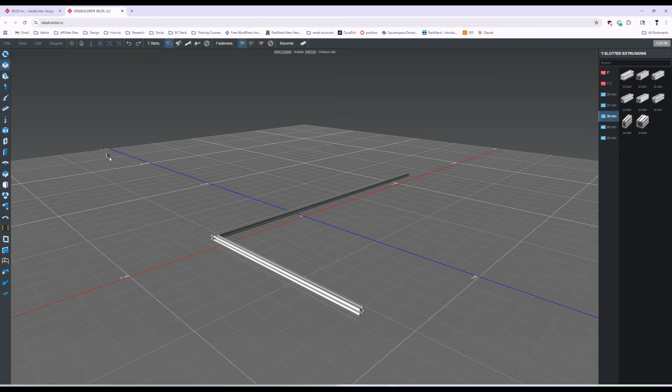So my very first drawing, I took all the measurements off of the old sofa and the bed—what those cushions were—to use as a template for how I was going to build this thing. Here's a copy of that drawing. You can see how wide the cushions were, the space I had between the sofa and the cushions where the fuses were and where the water lines ran.

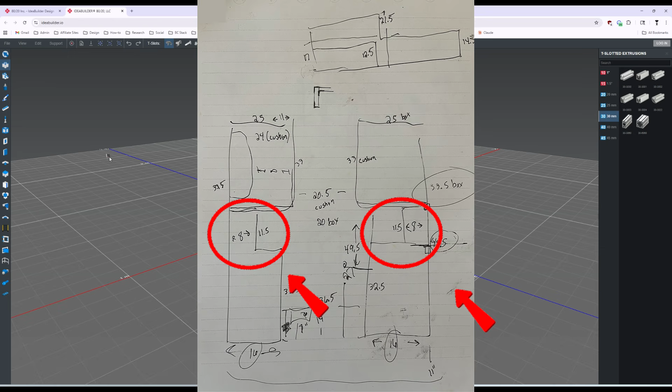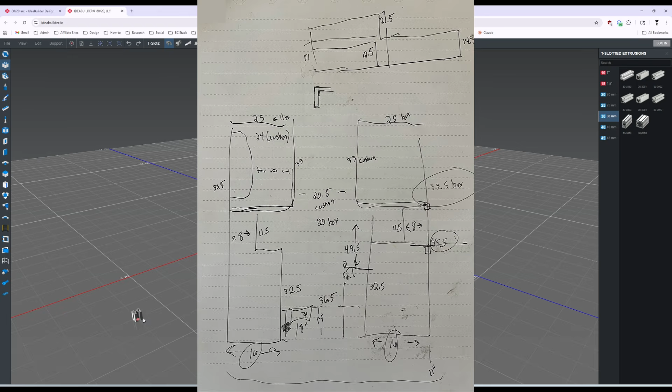And then the areas that covered the water heater and the inverter on the other side—so you see the whole dimensions. The cushions were pretty much 25 inches wide on that box, and what covered the other two components was 16 inches wide. This also shows how high in elevation everything was. So that started as my basic design. From there I drew, and I've saved copies of these along the way.

So here we go. You can see the very first bed drawing that I did came out something like that.

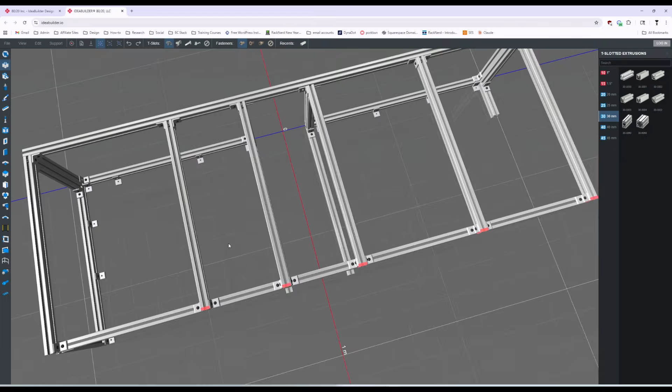Along with this T-slotted profile that you're going to use here, you'll also use this pan button, which is what gets you moving around. You'll use orbit to rotate things, so you can see the 3D design there. Then you use zoom to zoom in and out, either by scrolling with your mouse button or dragging on the screen.

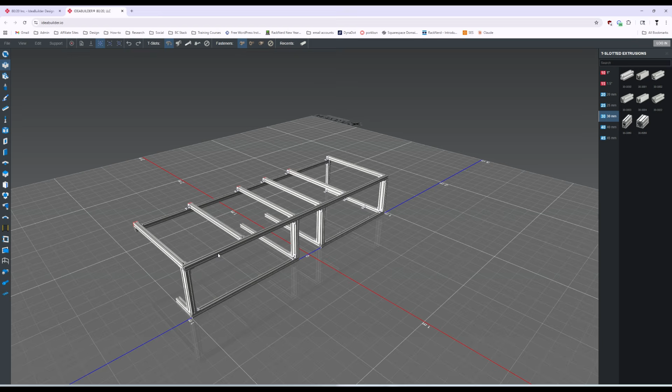This was the very first, very basic design for what I started doing. When you click on these pieces, I have to go back to select, click on a piece, and you can see what that is. That is a 1955.8 millimeter piece, which is about 77 inches.

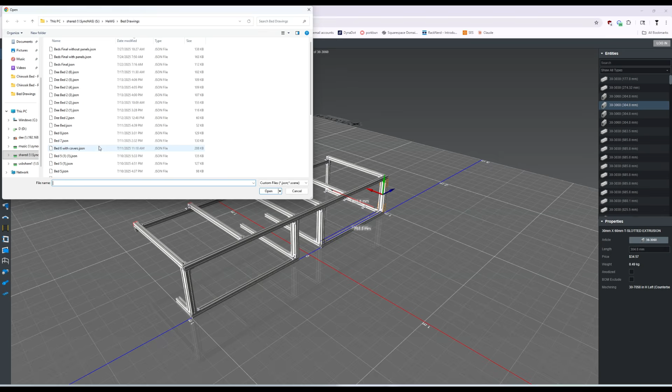So the drawings progressed. I'll just grab one of these, come midway through, and do one of my beds. This is one of the designs I did with the crossbars coming across this way for support. Since this is my bed, let me rotate this. This would be the space where the water heater is, and this, of course, is where a wheel is over here.

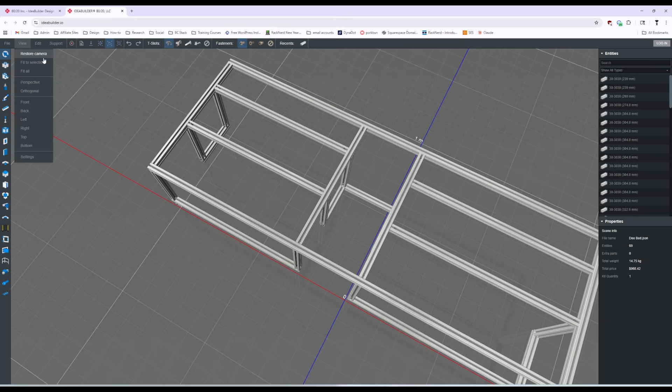So I played around with the drawings, trying to figure out the spacing for the support beams going through, and moved up to one of the last beds. Getting towards the end here, you can drag to rotate.

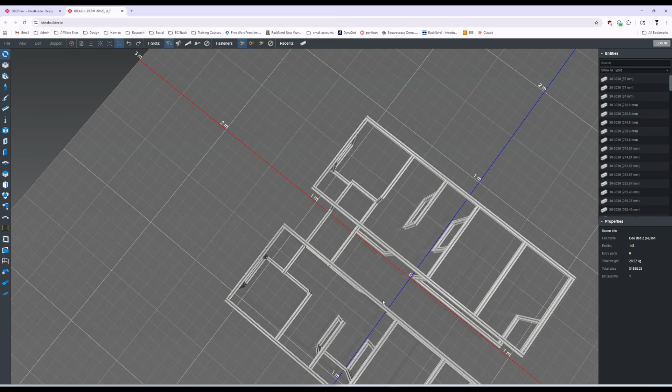Now we'll just zoom out a little bit so you can see where we're going. This is where I had a bit more of the layout done. We're not quite there yet, so I'm going to drag this over and pull this up.

So when you have the drawings here, you can do a file save as, and it will save it wherever you want, so you can have as many copies as you want. Absolutely amazing for what is essentially a free program.

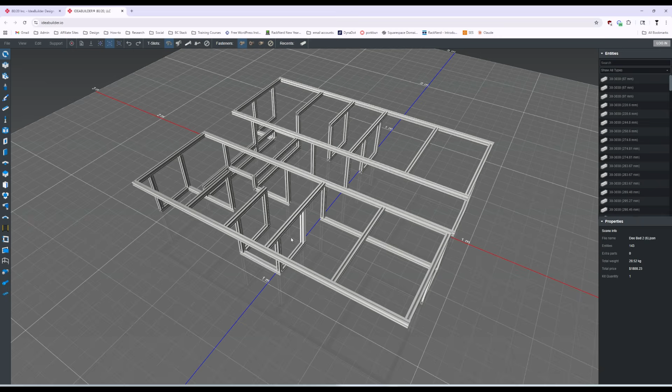We're going to open the last one, which is the bed final without panels. It's got a few panels in it, so you can kind of see where I was going with the drawings.

This ended up being the box that I had to cover the diesel heater with. This is where the inverter goes. This is where the water heater is. This panel has fuses, this panel has none, but the water lines are back here to go to the water heater.

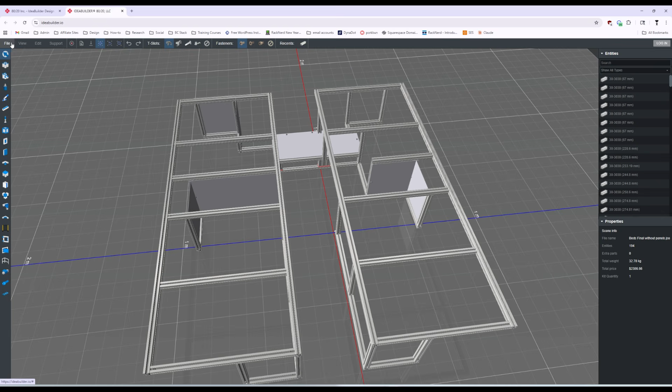So we will drop into the final with panels so you can see what we got, and I'll just rotate this around a bit. So that is where I ended up with the drawings.

This is how the bed is laid out with the extruded aluminum. If you look over on the side here, you can see all the different pieces that I'm using and all the panels associated with it.

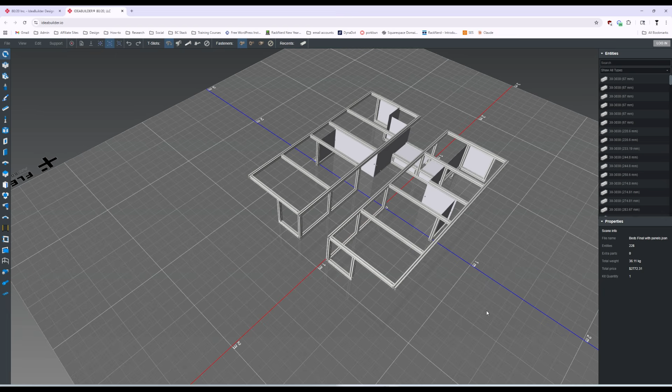So you know every cut piece you have here and its length, and you can give it a good spin and see where that is. So I ended up with the fuse box right here. There's an outlet here, of course, that faces the other way, and a USB plug here and here.

So that is basically the design. From this, I knew how many cuts I had to make.

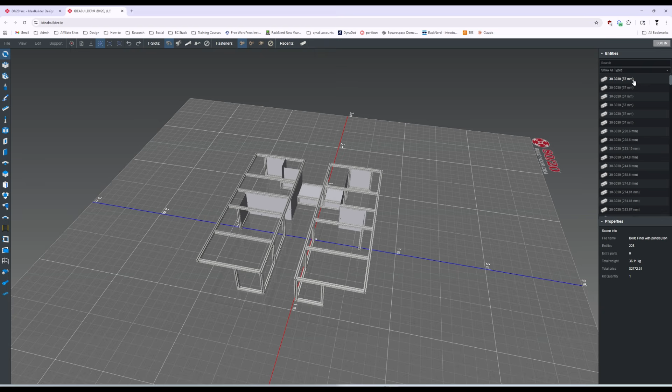I asked ChatGPT, and I'll give an example of this: I have this many pieces of this length of extruded aluminum, and I need them cut to this size. All right, let's go show you how I actually put all of this together.

The caveat for doing the design was everything in my van, all my measurements, all my thinking, is imperial, inches and feet. But the extruded aluminum I bought is in metric. Oh. So 30 millimeter was the size I went with.

So I had a spreadsheet and long talks with ChatGPT for how to convert that from inches to metric. It worked out really, really well. That's awesome. So once I had all the aluminum ordered and the design nailed down fairly well, I once again went back to an AI to tell me how to cut it.

This was the part I really was impressed with. I think I used Copilot for this, but ChatGPT gave me the same answers. You can say, I have this much extruded aluminum, I have this many 5-foot pieces, I have this many 3-foot pieces, and I need to make these cuts. How can I make them so that I have the least amount of wasted aluminum?

I haven't been able to find that chat yet, but I'll start it again if needed, just to show what I was looking at. I just want to show an example of using AI to help you make these cuts. These aren't the measurements or pieces I actually had, just an example to show you.

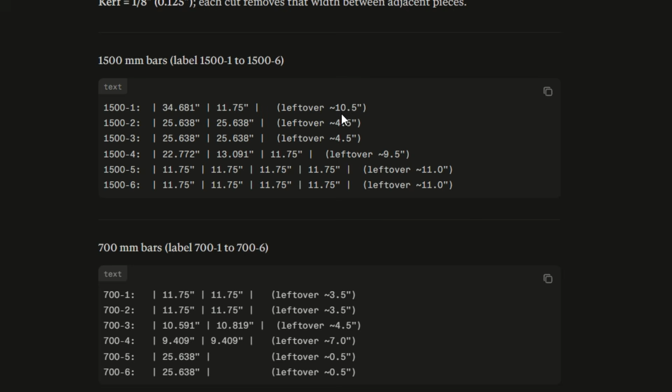So there are the cuts you should do with each bar. It will tell you on the 1500, make this cut, make this cut, here's the leftover you'll have. And then it was just a simple matter of building it.

A simple matter? Simple matter of building it. I thought it was pretty simple. Hey, Greta.

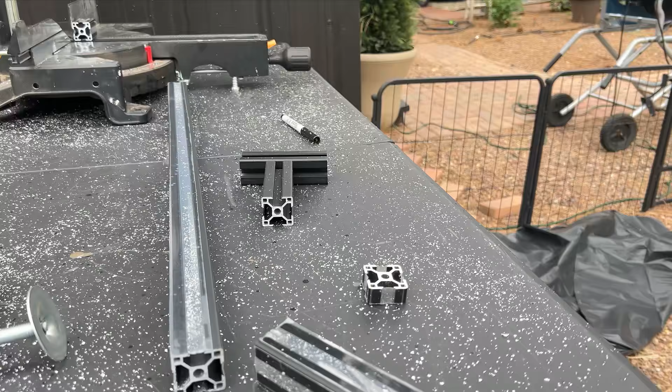Now, the work table in the backyard that has the saw on it, if that'll stay. Okay, going to do one of the legs. Well actually, two of the legs out of this piece. They're 11 3/4.

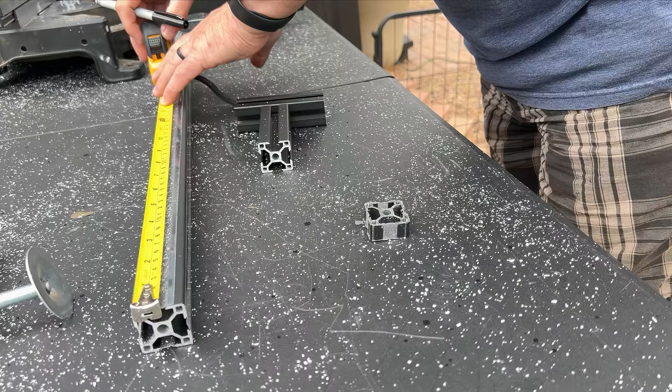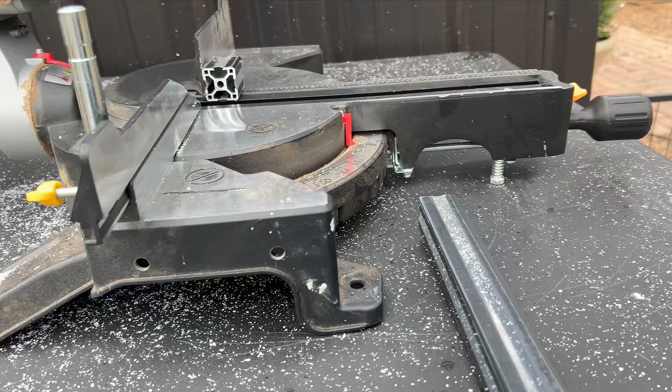So we'll mark it at 11 3/4. Take it to the drill. Eye protection, hearing protection is my AirPods. We do have an aluminum blade on the saw. We'll mark right where it's going to be.

Very loud. I have in the past been known to just line them up and cut, but I'm measuring each of these so I don't get off track anywhere. 11 3/4. And we go again. Repeat, repeat, repeat.

The aluminum I bought has this plastic stuff on it. It peels right off. Kind of satisfying actually, but I figured it catches a little bit of the aluminum, so I have less to sweep up after.

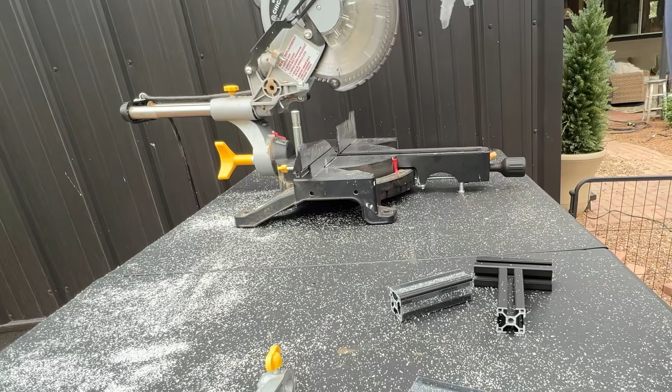This is my makeshift workbench in the backyard with the traffic going by. These are the elbows I'm using for a lot of it. They have these little nuts that go in here, on each side.

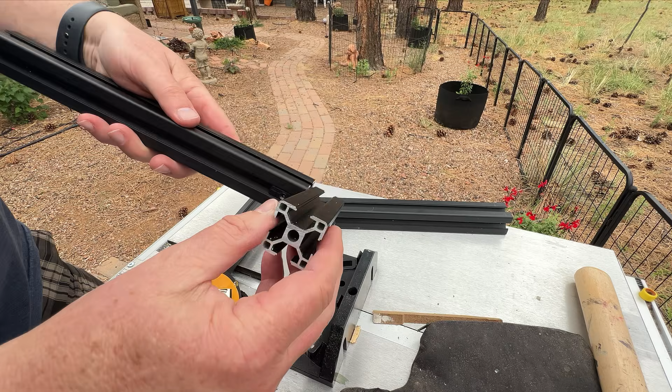So screw those in a little bit to get them ready to use. And when you're using these, you can put them so this one will not move down, and that's where you'd put anything weight bearing. But just as an example, they line up pretty well like that. Obviously you can slide that over like that, so you'd have your weight bearing there, and it would go in like that.

So I'm trying to decide, for things that are going to have a panel, would it be better for me to use these so I can hook the panel onto that, or just hook the panel onto this, which is probably what's going to happen. So alright, let's put this together.

I think, okay, so this is the top. You want all of these in before you tighten everything down, because you don't want to have to come and take it out and put something in the middle, but you can. For these it doesn't really matter because this is just going to be sitting on the ground, and there will be something on top to hold it, but it'll be sitting on top of it. So this whole thing, I'm not worried about anything weight bearing because it's all very solid.

This is the other type of connector. See that washer, and then that goes on there. This will slide under into the aluminum, and you'll put it on like that. It goes into the aluminum like that. Oop, like that, and then you just tighten it down. So of course we want it in the brace, bracket in there.

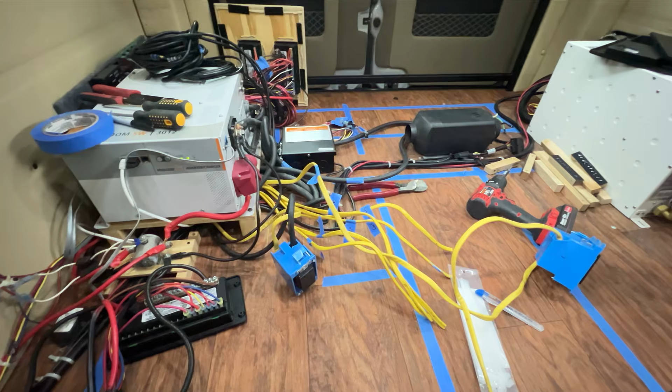I'm considering building a box around the water pump, or considering leaving it just open and putting things around it, cleaning it up a little bit. We'll figure that out. There'll be a panel back there to protect everything, and then one, of course, going around the water heater. Decided to do this side first because it's easier than doing this side that has all of the electronics and wiring, etc.

There are three lines over there that run to the rear TV. They are not in the way, they're just going to be tucked over behind the water heater, no problem. This HDMI line now makes no sense, it feeds from there to there, and there's nothing on this end, so that HDMI line will come out. I'm not sure about the other one because it's back there and connects to there, and I'm not ready to rip it out yet.

Batteries. So the next step is to figure out how much of this foam can I cut away so I can get as much storage under here as possible. Again, this is just going to be open storage. The floor rails will be connected like that, same as we're going to do in the back.

Before you seal up anything like this, where you're closing that in, make sure you have all of your connectors in that you need. I'm using these little elbow things that I'll show you. That will not work there once I have the bed rail on it, but it's working to hold it in place now, and that's what I'm using in spots like that.

Obviously I have the triple there, it's tough to see in the light, but it connects three together, like so. So that will make the rail length need to be what, 30 millimeters shorter?

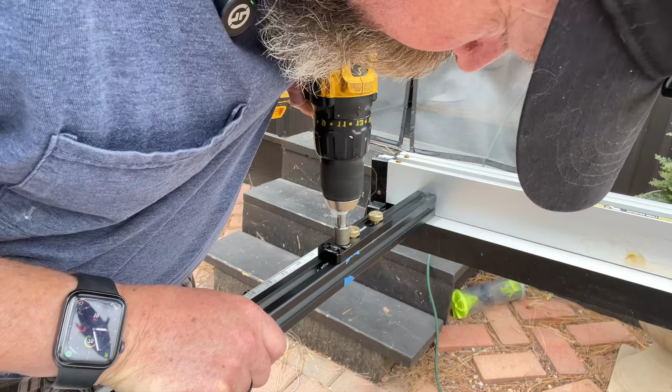Told you my battery was low. And that one vibrated loose, I don't like that. Almost there... that's it. I have a hole like that. Then we'll do the same thing on all the other ones.

Part of that build was figuring out how to frame in the water heater and the inverter. So I settled on some ABS plastic that I mounted to the extruded aluminum, I'll show you how we did that. Everything just fit so super well. And then I built the box to go over where the diesel heater was, which I'll show you too.

So what we've done with the teardown: first, the bed frames are built out. It's a mess, but the bed frames are done, put together, and secured. We're building the box, I think we talked about that.

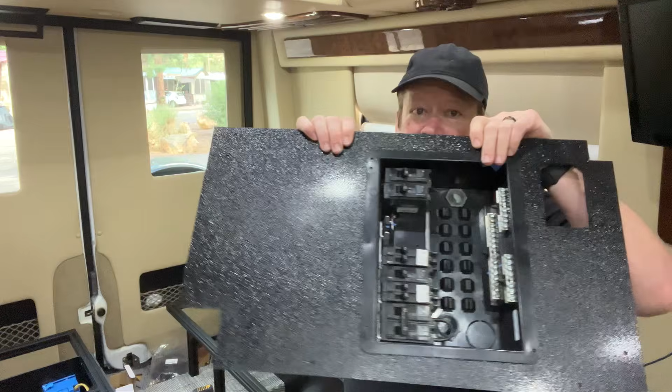So the wires have been cut to length and pulled back. Next we will just take off the insulation and pull them into the fuse box, and then into the breaker box. And then we can secure that to the aluminum.

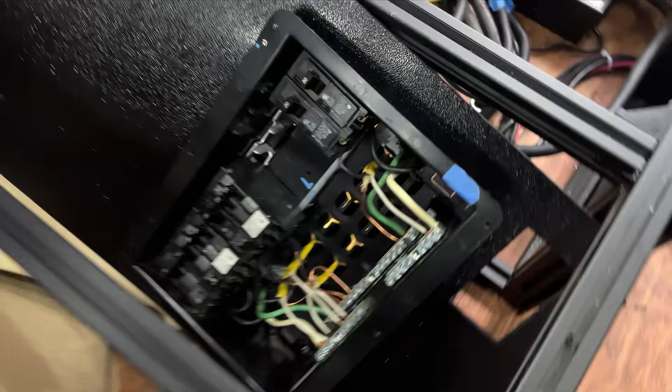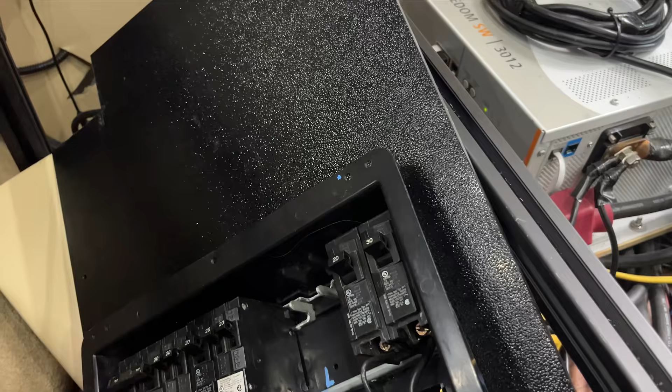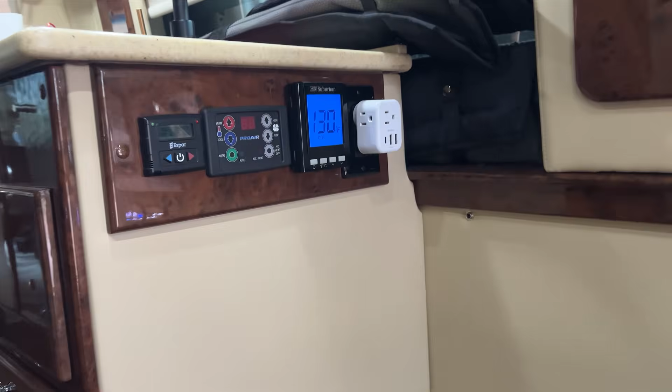Everything's wired in, everything works except for the receptacles. This powers the outside receptacles here. I don't know about that one - I'm not sure, I think that one works on here. That is for that receptacle, and likely that receptacle.

This is not long enough to do it with it out, so I need to install this, and then I'll be able to connect that in. Not a problem.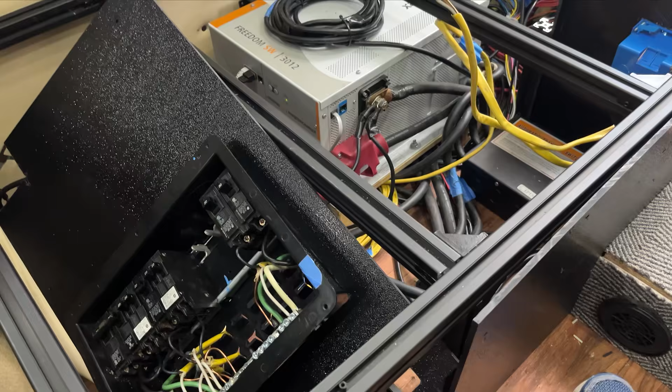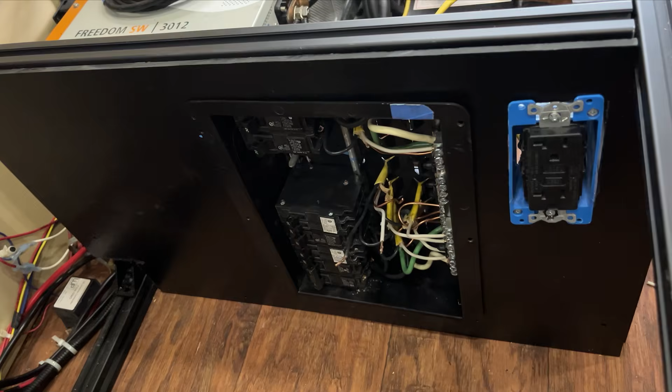Okay, I had a little battle with that fuse box to get that breaker box panel on, but everybody decided to cooperate, so that is long enough, as it turns out, to get in there. So I have to get in there and get that wired up. I need a little bit more light, I think.

So that is the view when you open it. I am not sure if that is going to stay silver - it might go black, you know, because it's very shiny there. Either we'll get a black one or paint this one with some Plastidip. But there it is.

It is put together, and I do not hate it. Let's see what Cindy thinks.

Okay. Look at that, baby, oh my gosh. Look at it, looks so good. Look at that, oh my gosh. You're so awesome, look at that, so awesome, right? That's amazing, oh my goodness. Oh my goodness, look at it. Look at it, come on. That's pretty awesome. Remember what it looked like when you first ripped the couch out? Oh, I remember. Look at this, I love this.